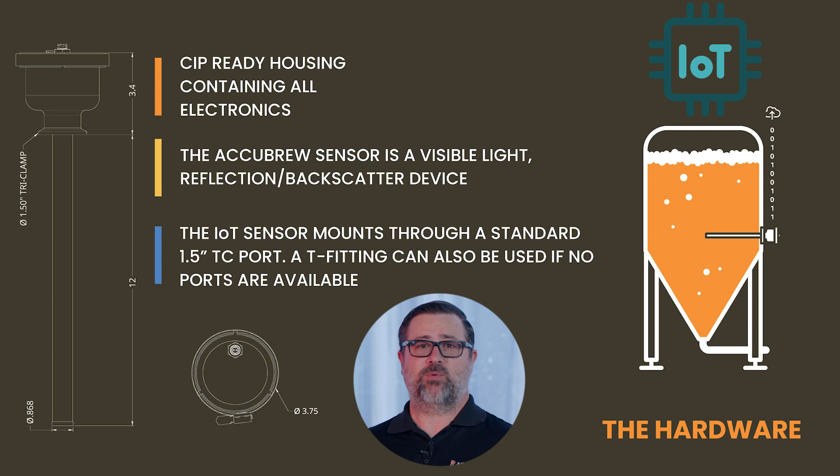The body of the sensor is a robust stainless steel body. It comes with a 1.5-inch tri-clamp mount, which makes it easy to mount in fermentation vessels. It also includes an acrylic faceplate, which combined with the IP69K leak-proof connector allows it to easily be washed down and foamed without any issues.

We also include a power supply. The power supply includes a 120-volt transformer, which supplies a low voltage 5-volt supply to the device itself. This includes a 10-meter food grade cable, which also includes an IP69K waterproof connector.

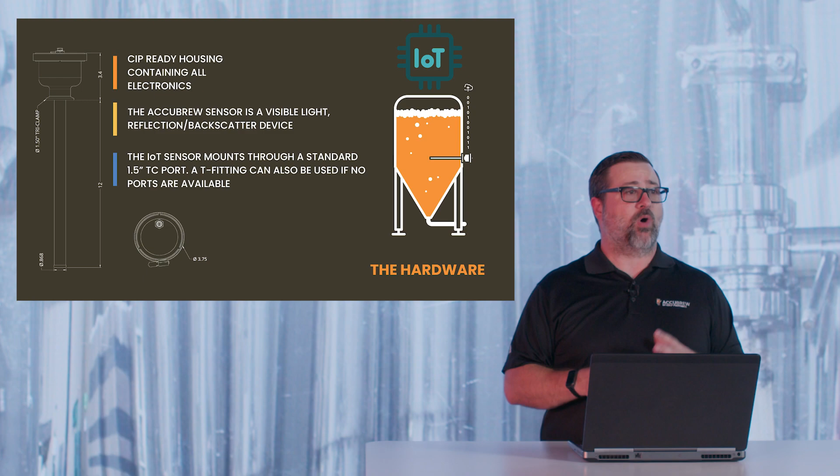Next, we have the electronics. The electronics were designed here in the USA in sunny Oldsmar, Florida. First up, we have the Wi-Fi enabled microprocessor. This is what makes our device an IoT device. This allows us to connect to the internet and send data to and from the cloud at any time.

This also makes it very easy for us to push over-the-air updates to the device, so the brewer doesn't have to worry about SD cards and updating the device or anything like that. We also have an 1800 milliamp hour battery backup. This allows the device to continue taking readings even if you lose power in the brewery. It also comes with a memory backup, which allows us to collect data even if we lose a connection to the internet.

The device will continue to collect data and store it on the memory, and when you get internet back, it will then allow it to download it and make it available via the app.

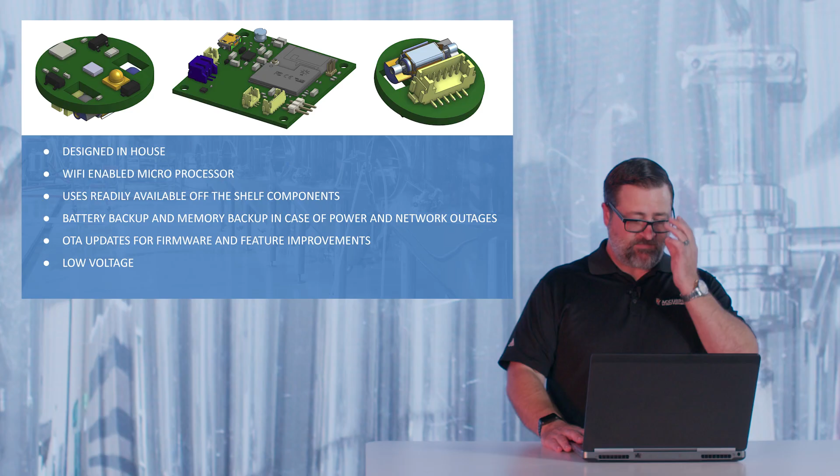Also included is a full visible white LED that is low power and does not include any infrared or ultraviolet, so you don't have to worry about your beer becoming light struck or anything like that. This combined with a MEMS light sensor is what allows us to receive the signal back and read the changes over time.

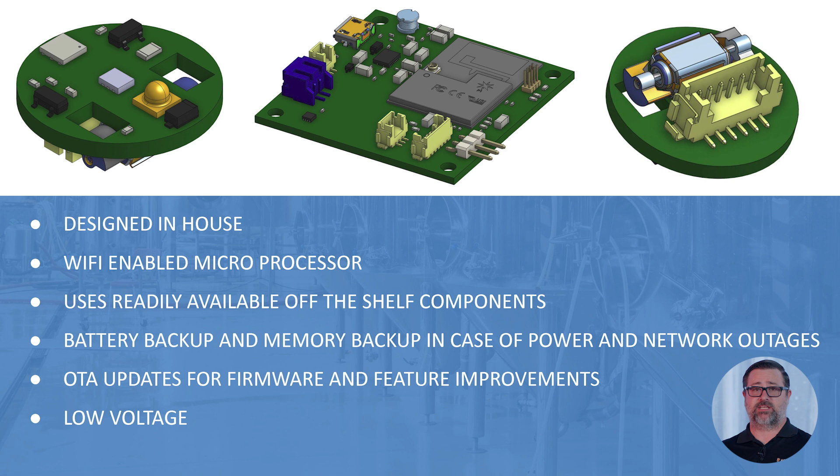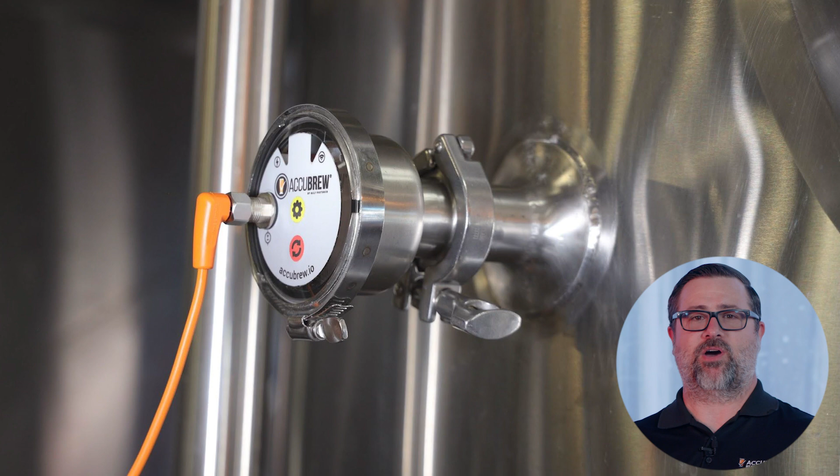Lastly, the device also includes a digital temperature sensor. This digital temperature sensor is very accurate to within plus or minus 0.1 degrees Celsius. It's also a digital temperature sensor, so it's very reliable and you don't have to worry about any calibration. And that's pretty much it. It's simple. That is the overview of the hardware for the AccuBrew fermentation monitoring system.

With that, I'm going to hand you over to Christopher Bailey, our Vice President of Engineering, and he's going to go over the user interface.

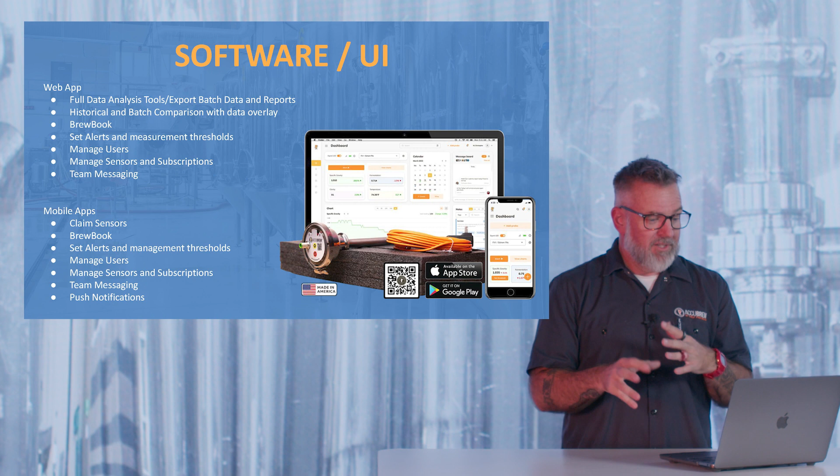We're going to transition into defining what our 4 measurement parameters are. We'll just kind of get started and talk a little bit about the mobile apps and the web app. AccuBrew has an intuitive user interface. We intentionally tried to keep it as clean, as simple, and as easy to navigate as possible. We used as many UI features that we could that people are used to seeing in other apps that would work with our app.

It's essentially data management, right? So there are some things that you all will have seen before in other apps, and that should make things easy for you. AccuBrew's system, as Parker and Bradley told you, has a software component, a hardware component, and a server component. The firmware on the hardware that Bradley described speaks to our backend servers and our machine learning prediction server, and then displays that information via the mobile apps and the web apps.

So the web app is the most full-featured example at this point, where you are able to purchase devices, manage the subscriptions to those devices, and manage users as well.

So our subscription model is one where we allow you to pause any device whenever you want. So if, say, you are in the Great White North and you have a really slow season for 3 or 4 months and you're going to go down to like 25% brewing capacity, you can jump into the app, pause those sensors, and continue on with whichever ones you're going to use during the off season.

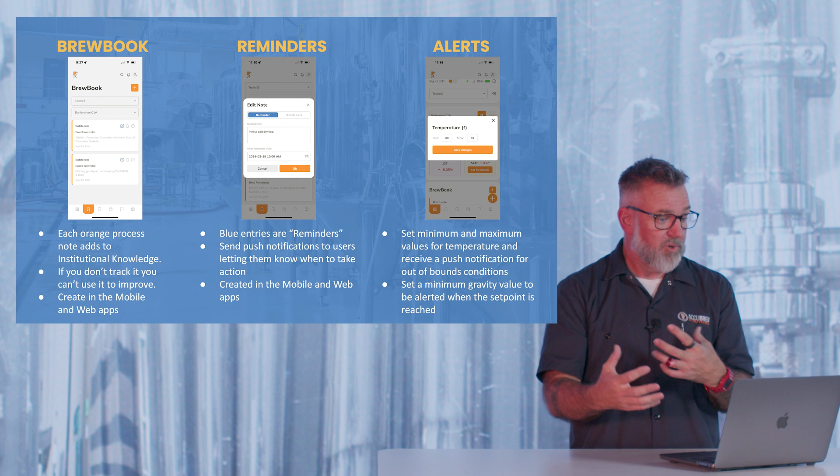Some computing is done, some calculations, and then the results are sent to the user interfaces, whether that's the mobile app or the web app. So then you see your 4 parameters: your predicted gravity, your fermentation profile, your clarity, and your temperature. And with that data, you are able to keep a close eye on your batch wherever you are and whenever you are.

And some of the most important features as we approach this app—because we are medical device manufacturers, we keep a lot of records, and some of them are paper records, not all of them are paper records. Anything we can get in an electronic format so that we can store it in a central location, we know that if we're tracking this particular parameter, we can go back and leverage that to make sure that we don't have process drift. And that's sort of what we were thinking here, and that's why we have a feature that we call the brew book.

A brew book is where you should store all process notes about your batch. Whether that's the day you pitched, the day you dry hopped, the day you decided to make a temperature change, or even if you notice that the temperature seems a little bit off on this batch compared to others, log it there, record that observation, and you'll have that in perpetuity.

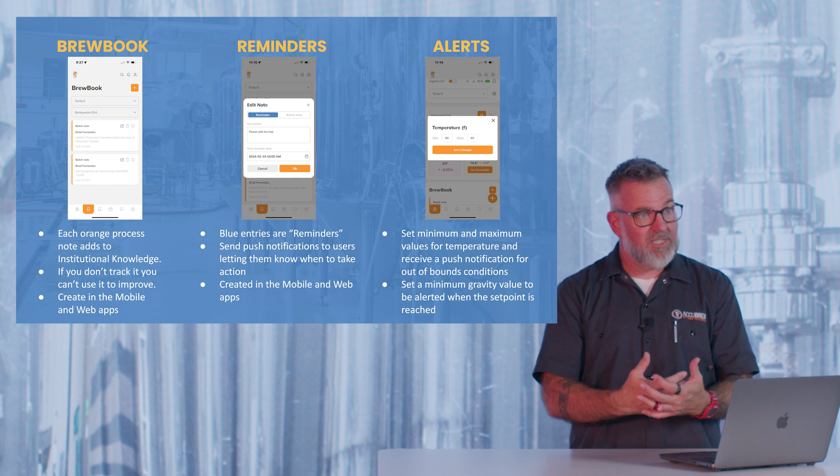As part of the brew book, we also have reminders. So if you're the brewery manager but won't be on site for a couple of weeks, and you want your assistant brewers or whoever's watching the shop to do things at a particular time on a particular day, you set a reminder, and whoever is assigned to that batch or sensor gets a push notification saying do this: dry hop, change the temp, start your crash. You have a record that push was sent, so you know that process step has always been done at the same time or when you wanted it to be done. That's a critical component - it helps with delegation, oversight, and process management.

A feature that ties into that is the team messaging built into the app. It protects employee privacy, and it consolidates and archives all of your employee communication, so that also becomes part of your historical record.

You can also set thresholds for your specific gravity and your temperature. So if you've got a known terminal gravity, you can say, when the gravity gets to this value, send me a push notification so I know it's time to crash or pump out or whatever. Also, if you have an issue with temperature management, you'll get an alert saying this temperature is outside of your upper or lower threshold, and you might want to take a look at things. Those alerts come every 15 minutes.

So every alert that gets sent via the UI and the software goes into your batch report, which you're able to export and print.

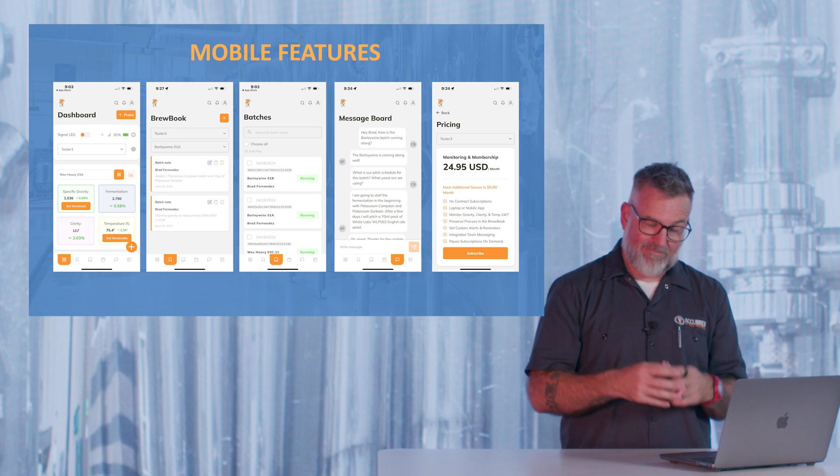Next, we're going to talk a little bit about what we actually measure - the 4 parameters served up to the user interface: predicted gravity, fermentation profile, clarity, and temperature. Temperature makes sense to everyone, so we probably won't talk too much about that.

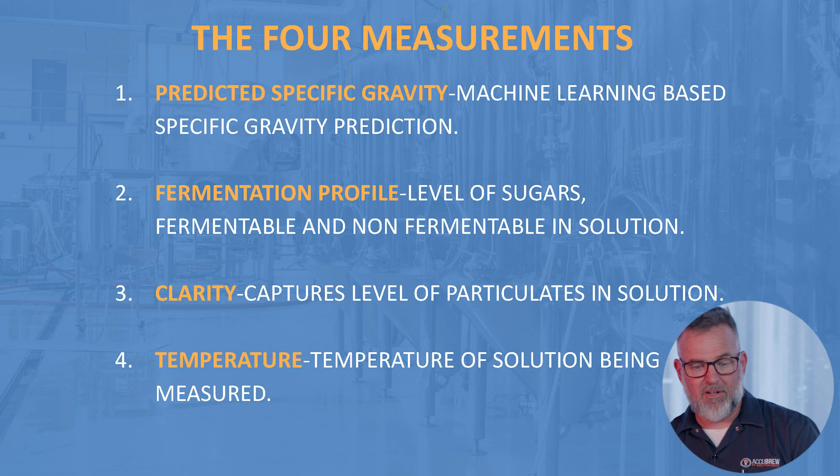Predicted gravity profile is a visible record of the gravity predictions made during fermentation. You may notice we don't call it specific gravity, we call it predicted gravity. The sensor every 15 minutes collects 18 points of data. All that data gets sent up to the cloud, and we use our machine learning server to churn through that data and spit out a predicted specific gravity value, which is what you see in the user interface. That's great, but it's best when used in conjunction with the fermentation profile and the clarity. Later in the presentation, when Bradley comes back up, we'll talk about how to use the predicted gravity, fermentation profile, and clarity together to help determine what is actually going on in your process.

Fermentation profile is a relative record of total sugars in solution, both fermentable and non-fermentable.

We leverage the fact that sugars like to absorb blue light. So we measure the change over time in the amount of blue light returned to our sensor. If we fire up our LED and we don't get any blue light returned, we know there are still a lot of sugars present. As those sugars start to get consumed, we get more blue light returned to the sensor, and that is how we build our fermentation profile model.

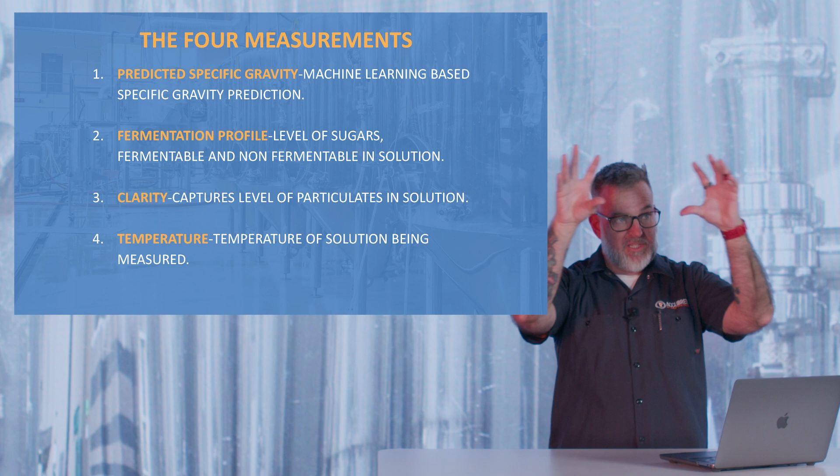Clarity is really kind of unique to our system. Clarity is a measure of particles passing in front of the sensor window in solution. So we get this convection, and say your AccuBrew sensor's here, you're gonna see all this stuff that rises or falls in front of the window. Early in fermentation, when things start kicking up, you're gonna get a lot of activity.

Spikes indicate a less clear solution and dips indicate a more clear solution. So you'll see throughout the fermentation process, you get lag, it's really kind of clear, and then as things start to kick off, you get this big spike, and then we kind of maintain for a little bit. As striation layers in your fermentation settle out, you'll see those pass in front of the window and you'll get a big spike, and then you'll get a drop as we get through that final layer.

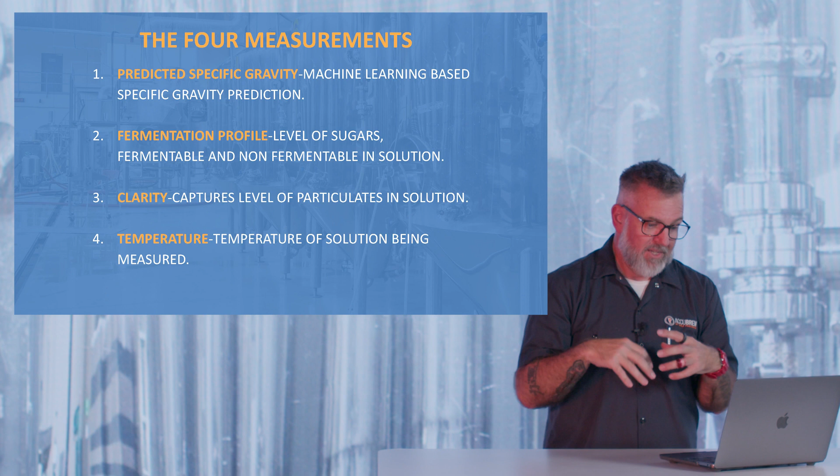So that's really clarity, and it'll make more sense to you when you see the graphs combined with the predicted gravity and the fermentation profile as a total picture of what is happening.

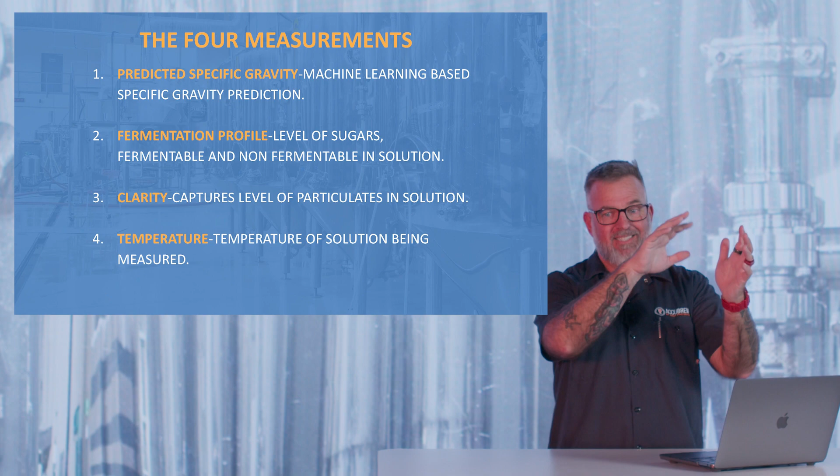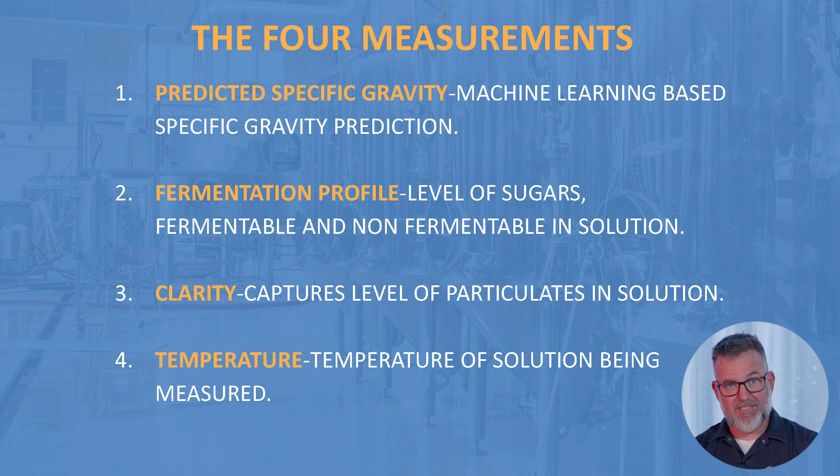Predicted gravity is a pretty gradual rate of change measurement, there's not a lot of dynamic changes there. But the fermentation profile and the clarity, you will see a lot of changes you probably wouldn't expect. Even when you are at your final gravity, you're still going to get settling, you're still going to see some extraction from things that are in your brew, and so it will be interesting to you based on these definitions what you can infer when we see the data in a few minutes.

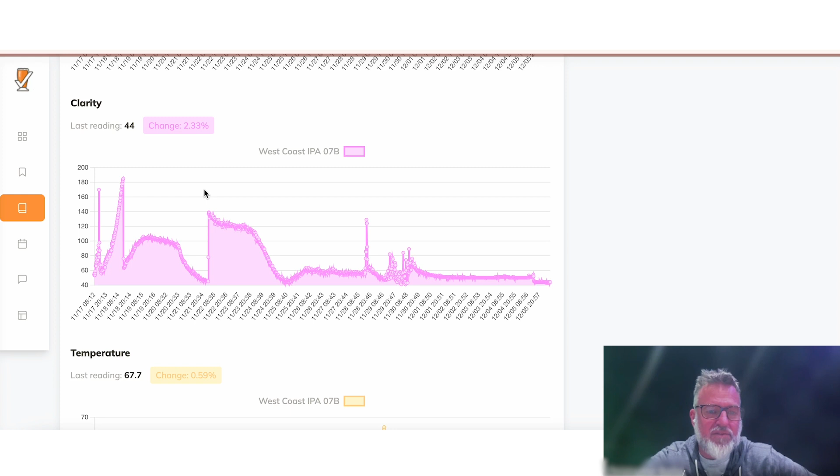So, what would we call this phase, Brad? I would say that's just the settling out phase. So right before that, we have this area between our two peaks, and that seems to be where the majority of the fermentation happens. Go to the middle of that area, Chris, a little bit to the left. Here? Yeah, there.

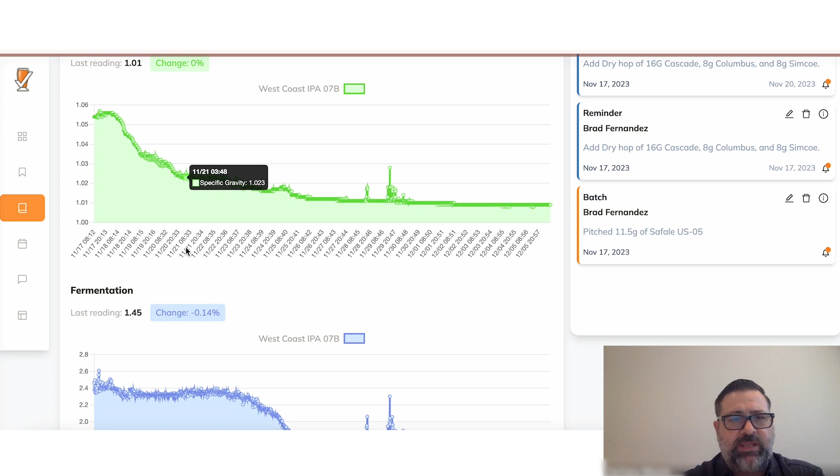Can you just scroll up to where the SG is, so we can compare. You can see a majority of the fermentation, we're down to maybe 1025 from where we were at 1055. So we're down a good 30 points at the middle of that fermentation. By the time we get to where that secondary peak was, it looks like the majority of fermentation has pretty much wrapped up. This third high peak here looks to me like, okay, the yeast has pretty much finished.

So I would assume this is kind of your flocculation stage. Everything's pretty much done with the fermentation. You have a little bit more fermentation to go as far as sugar and alcohol, and whatever other chemical changes that are critical for this style of beer. So that would be, I would say, the flocculation stage there.

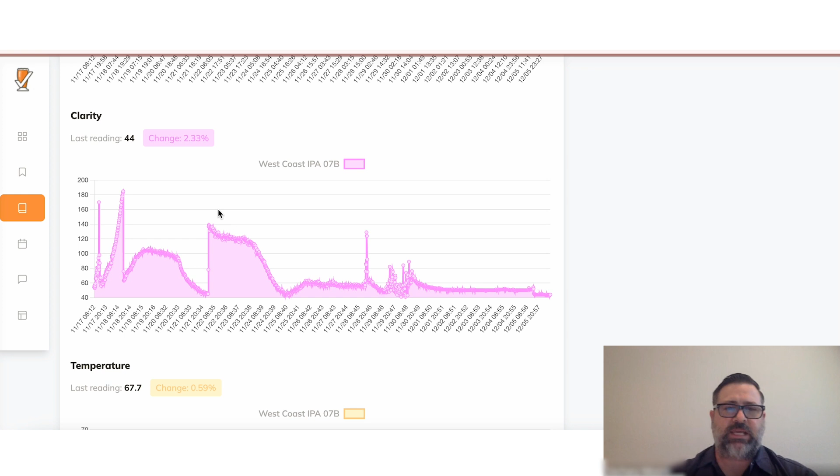It's interesting to me because we use clear fermenters, right? And then to actually be able to go look at the fermenter and see those striations and verify that those are settling out of solution in a very homogeneous way, which is why you get a sudden uptick over 45 minutes. These three data points, this is 45 minutes on the clock. And then you've got all this settling passing in front of the window, and then how gradual it is after that.

And then after we talk about dry hop, I'll pull up another one of these batches and we can do a little comparison there.

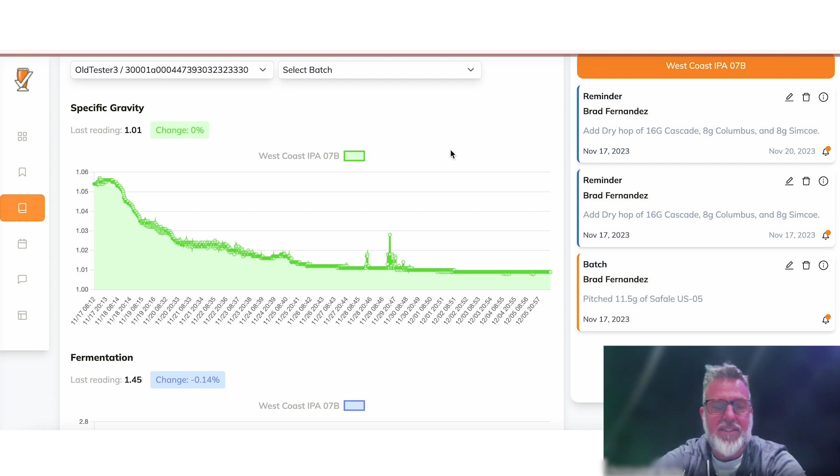Temperature, everyone kind of knows what this is. There's some interesting action here with the dry hop that we'll talk about. So if we check out these notes, we can see Bradley hopped 32 grams worth of stuff here. Correct. And it looks like you did that on the 28th. Yep. So you created these reminders for yourself.

It's interesting, as soon as you drop your bag in and your weight to hold the bag down, you immediately get this little uptick in density. And it's important to think about that in terms of the way that the sensor works, right? Because it's essentially a camera, it's going to inspect everything that passes in front of it. And if when it happened to be taking a measurement, something that Bradley dry hopped was passing in front of it, it's measuring all of that particulate, not just the liquid that's surrounding it.

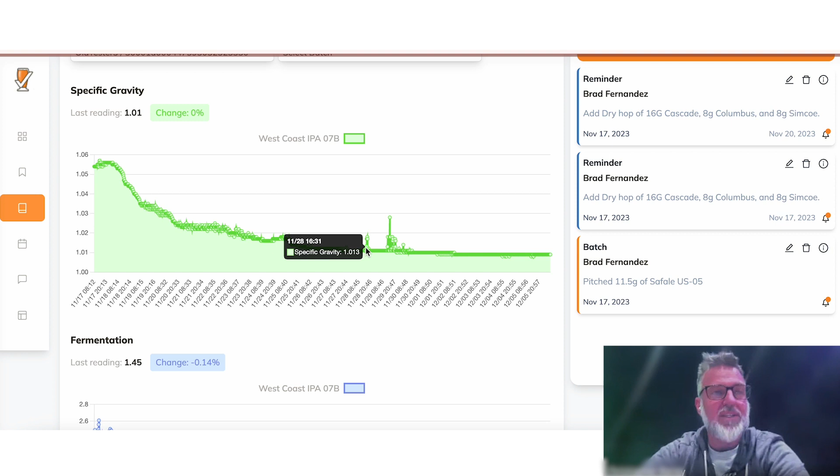So there's the initial hop, and you can see in this fermentation profile, when we're talking about the general chemistry and the sugars and whatever else might be in those hops that are affecting the blue light output, and also some of the other outputs, because this is a ratio of blues to some of the other colors. So as the initial reaction of the solution to the hops being placed in the bag, you get these density changes and then these general chemistry changes. And then from a clarity standpoint, which makes the most sense because this is the visual record of particulate in solution, you get the largest peak here as particulates pass in front of the window.

What was really interesting to me is the temperature correction based on what you dry hopped. You didn't put a lot of mass in. I guess as a percentage of the whole, it's more than you'd typically see in a brewery, but it's kind of unique to our setup.

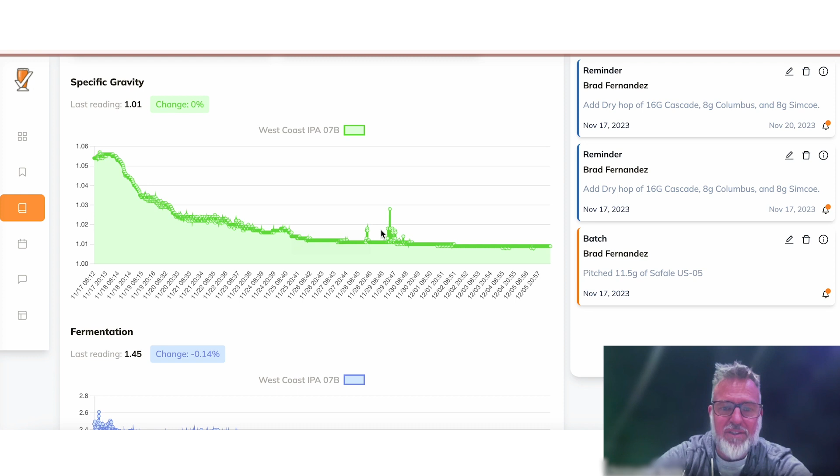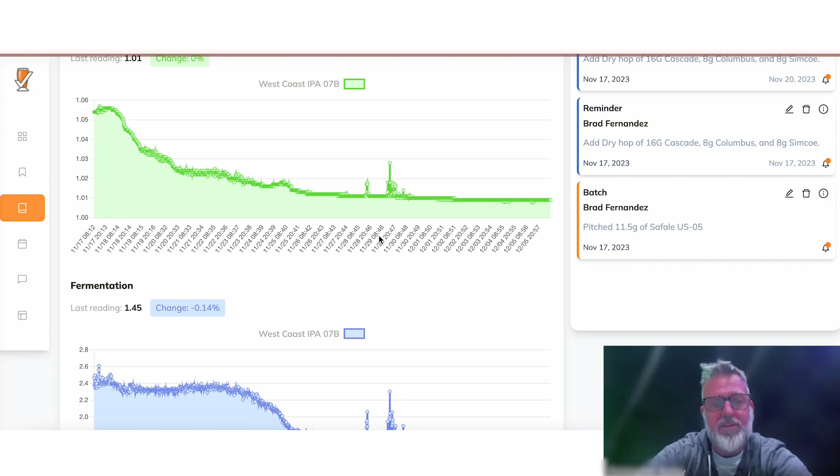So then we get this little lag area where the hops are probably absorbing liquid and starting to excrete, or the liquid starting to draw chemical compounds out of them. Bradley, if you want to talk about that in the fermentation profile a little bit, I'll try to keep the clarity graph on screen as well, so we can draw conclusions with both of them together.

Yeah, so fermentation profile, again, this is why this measurement is so good and gives brewers insight where they haven't had it before. We're actually able to see the extraction of hop compounds from the hop into the liquid. We can see these peaks and valleys, and one of the neat things is we can get an idea that this started at the 28th and ran through about the 1st, till we get the tail end of the jumping around and it starts to level back out again.

Depending on the brewer, this could be critical for getting something out of a tank. If they, for example, normally would sit on their hops for 5 days, you're actually able to use data here. Look, here you go, we're not getting that change anymore. You're not extracting anything from the hops at this point. If you're not seeing any other changes that are important to you, you don't have to wait an additional 2 days before racking into the next tank.

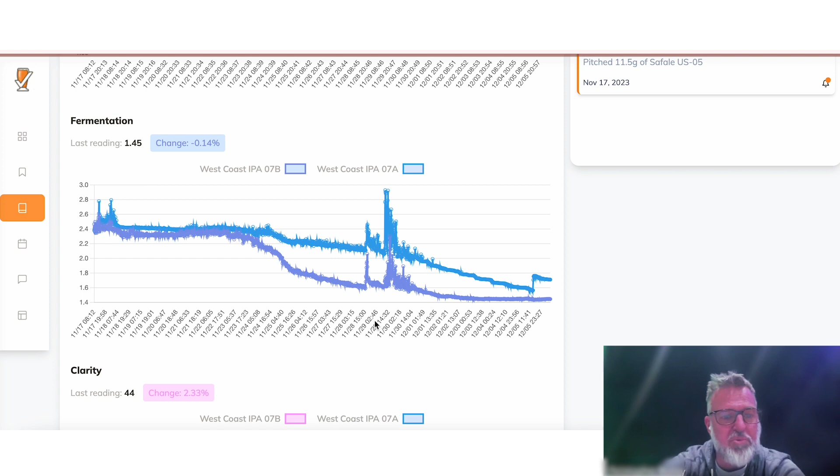And even in the beginning of this fermentation, Bradley, if you look at this fermentation data, it looks like this 7A wasn't nearly as well settled out as the 7B was. There's a lot more particulate in here that the sensor's measuring.

This graph, right? So what you were talking about here with your lag phases, these are really close to identical between one or the other.

So looking at this blue line, this is the second batch that we thought maybe didn't ferment as quickly. You can see we have this sawtooth pattern with the lag phase and then a drop out with much less amplitude in terms of activity. So this would be your anaerobic phase, as you were calling it, Bradley? Yes, anaerobic - there's a lot less activity there in comparison. That would probably explain why it didn't ferment as quickly. It's a possibility, that could be a possible indicator of yeast issues.

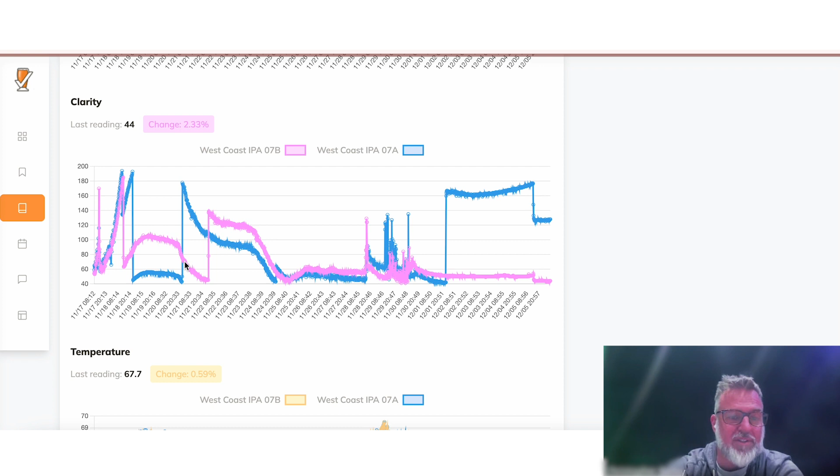Yeah, our temperatures - this one was a little bit colder, right? Maybe that had something to do with things not kicking off as quickly or efficiently as in the other batch. And specifically, at a certain point we changed our temp controllers so that it tightened up our swing as far as how many degrees we go.

So this is a perfect example of where maybe a brewer made a change and noticed a difference in their beer. If they were making tasting notes and adding them to this batch, they'd be able to go back and see a difference in flavor and narrow down what the issue was. With this data, it's pretty clear that this one fermenter had a lot more swing and was getting a lot cooler. So maybe this temp sensor was set too cold and that was missed, made it through the cracks.

But with this data, we're able to immediately do a side-by-side comparison and fairly quickly figure out, okay, we had a little bit of a temperature issue. We need to pay closer attention to that on our next batch.

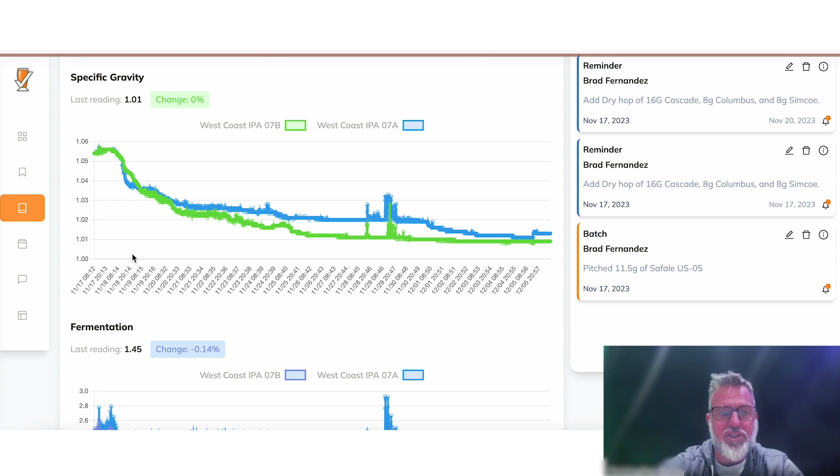Yeah, and if you only have your temperature data and your SG data, there's not a lot of information you're going to get from that. But if you look at this data as a whole, you see slower fermentation in the fermentation profile and in the SG, and then less amplitude over time, and you put that together with your temperature - that's how you build out these footprints, fingerprints, and infer process issues based on that data. So it's important to look at the four measurements as a whole, not as standalone values, because by themselves they don't tell much of a story compared to when they're used together and leveraged as a whole.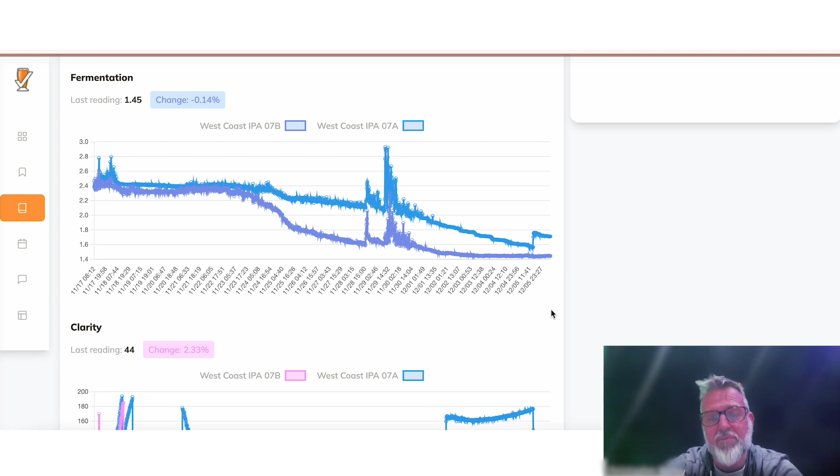So this is interesting as well. It's possible that this sensor was picking up a bit more of the trub pile towards the end of the fermentation than the other one, and that would explain why it appears to have so much more suspended particulate in it. It would also make sense that we're seeing a different chemistry profile based on what we're measuring. So yeah, there's a little bit of an SG difference there as well.

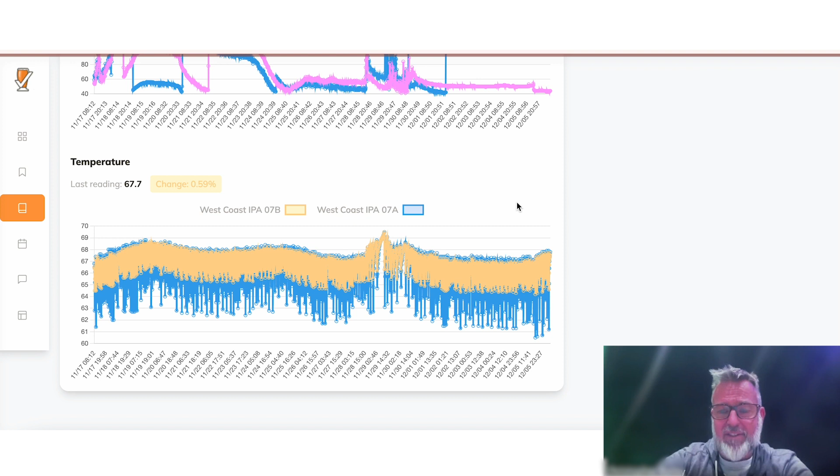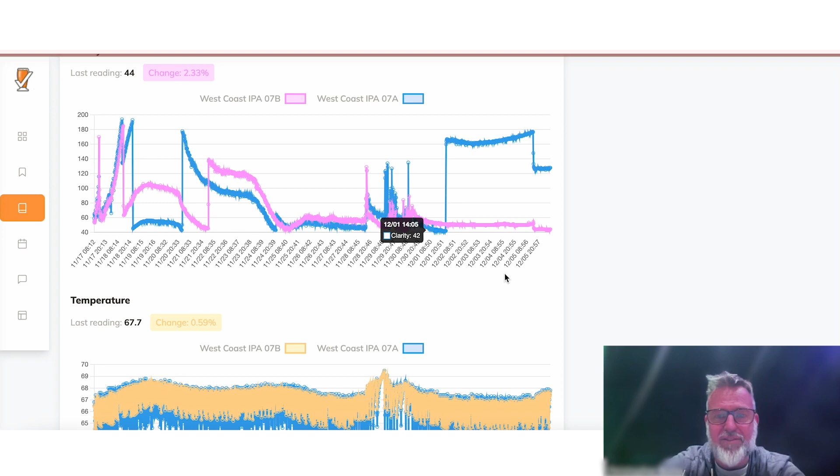That's a bit more of a deeper dive into what this data is and how Bradley and I use it at the shop - Bradley more so than me, but I think the clarity is pretty incredible about what it can show us about the process.

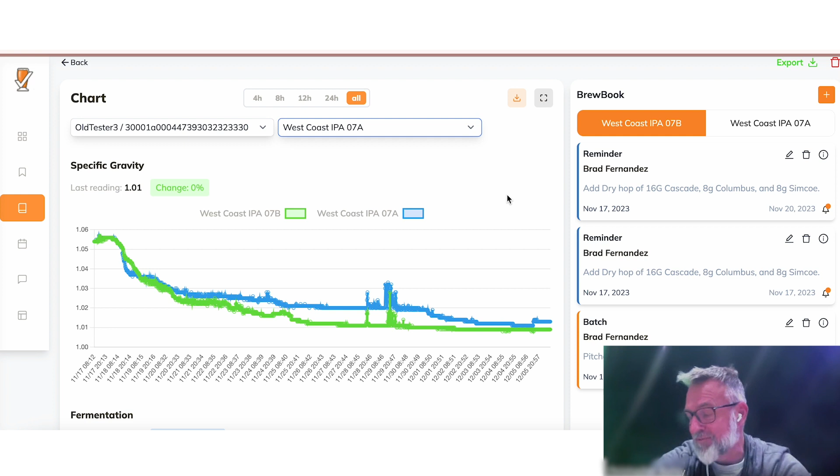And with this data and accurate batch notes, you'll be able to compare and leverage that data into being as efficient and as consistent as you can. Absolutely, and like you said, the notes are a big part of it. Adding anything you can in there - yeast counts, tasting notes, anything like that - is going to give you the ability to troubleshoot easier down the road, rather than pulling out brew sheets and hoping you have some good data on there.

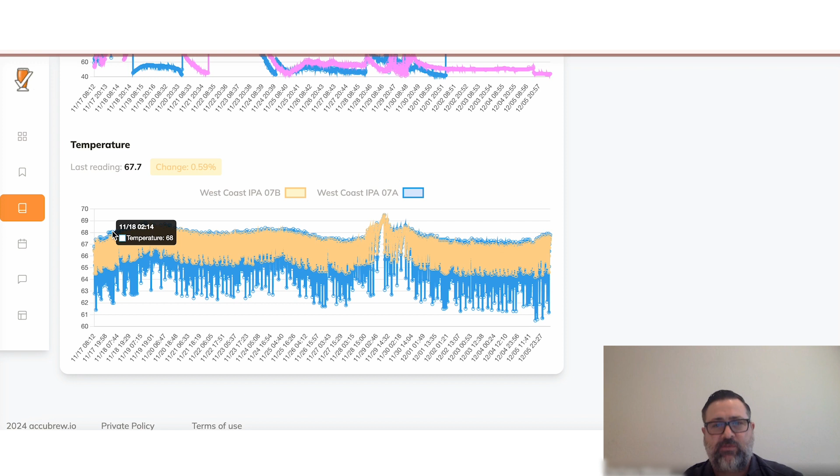You can immediately do a side-by-side comparison with a reading being taken every 15 minutes. For example, if you go back to that temperature one, the typical brewer would not have insight into the swings happening with the IPA 07A. They might have a temperature written on a brew sheet, but the ability to see the actual swings over the course of the day and over the course of an hour is way more useful and actionable than just taking a thermometer reading every once in a while, or never taking it and just setting it and moving on.

Yeah, and it's possible every time you walk by this thermometer, it says 68 degrees. But that means you're missing all those data points that you didn't happen to walk by the thermometer at that time.

Important note too, like Bradley was saying with your tasting notes - even if you finish this batch and it's not fermenting anymore and the run's been stopped, you can still come in and add tasting notes, any kind of finish notes, or any post-fermentation process notes you want to add. That's a critical part of the system as well.

Anything else you want to add in closing, Bradley? No, I think that's it. I think we pretty much covered the ability to use the data to make better, more consistent beer. I agree. All right, thanks for your time, Bradley. Thank you, Christopher. Thank you, everybody.